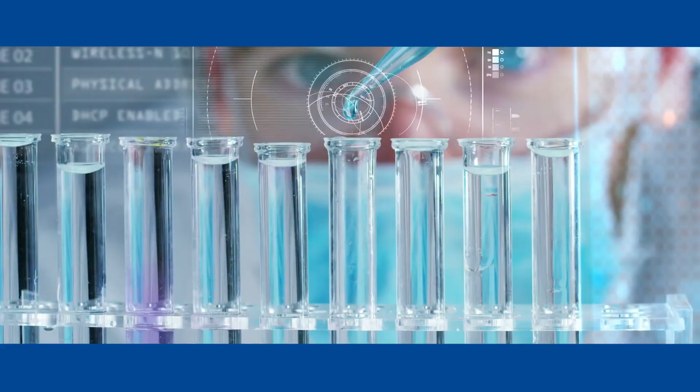In our universe, all things are driven by energy. Energy powers our sun, our environment, our society, even our bodies. Energy is life. New and profound advances in science and engineering are allowing us to harness this energy abundance in marvelous new ways, to create clean, affordable, and reliable energy for all Californians.

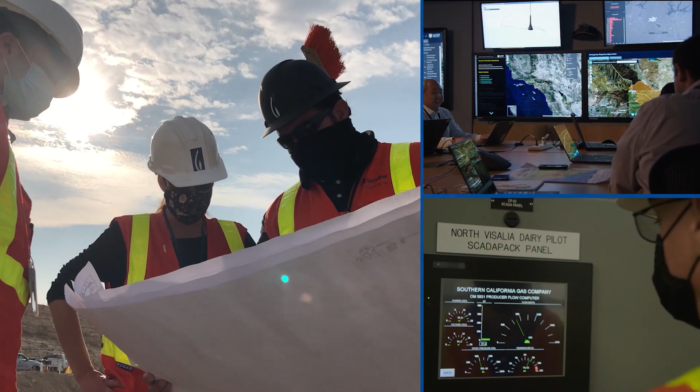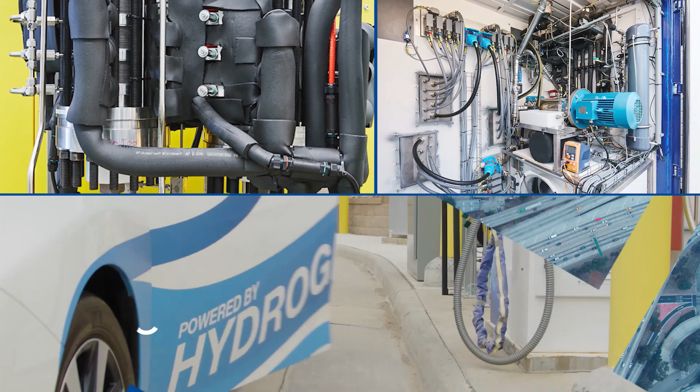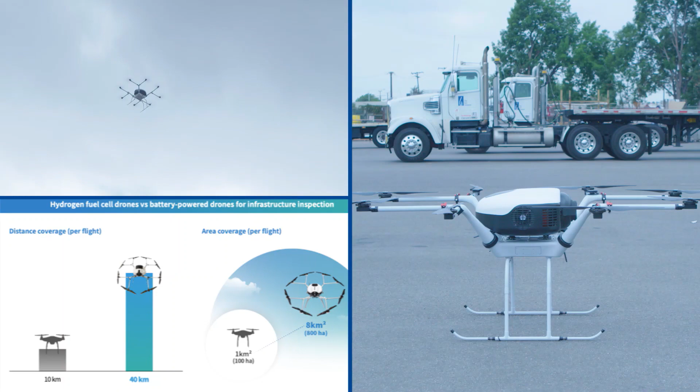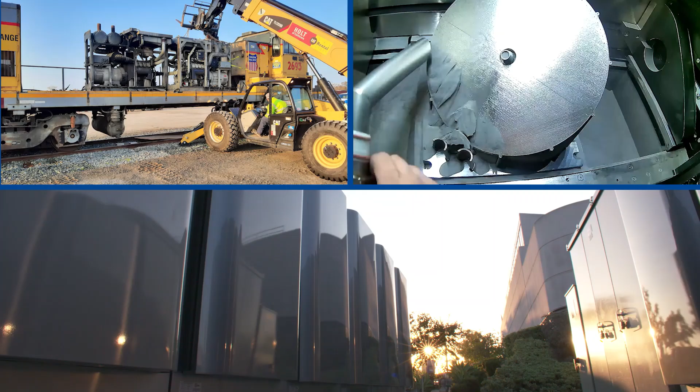Doosan Mobility Innovation's hydrogen drones that have 4 times the flight capacity of lithium-ion powered alternatives. And hydrogen-powered yard trucks that can move massive shipping loads for 20 hours per day with 0 emissions. These revolutionary projects are saving energy, reducing emissions, and improving air quality, as well as increasing energy safety, reliability, and affordability for all.

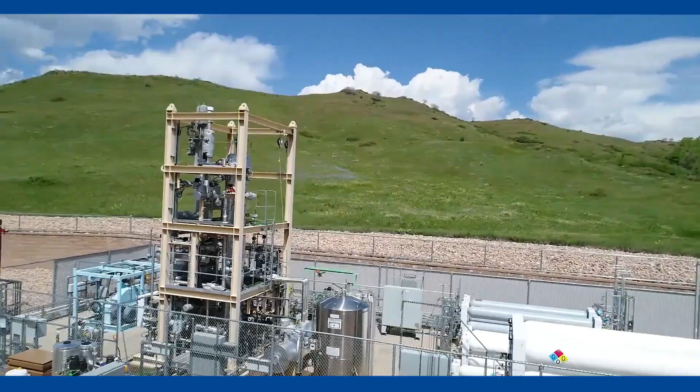At SoCalGas RD&D, we believe in clean energy abundance, so we are sharing this pivotal research in order to deploy these innovative technologies across the world. Because energy is life. And we believe a clean energy future will bring a better future to everyone. SoCalGas, Research, Development, and Demonstration.

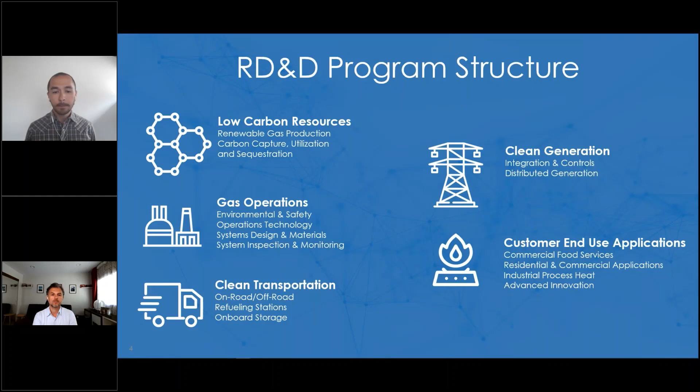In 2022, the SoCalGas RD&D team managed 339 research projects. And on average, our RD&D projects generate a 7.2x funding ratio, meaning that for every dollar of RD&D funding provided to a project, the project also received over $7 of external co-funding. So for example, in 2022, 8 of our RD&D supported projects were awarded about $18 million from the California Energy Commission.

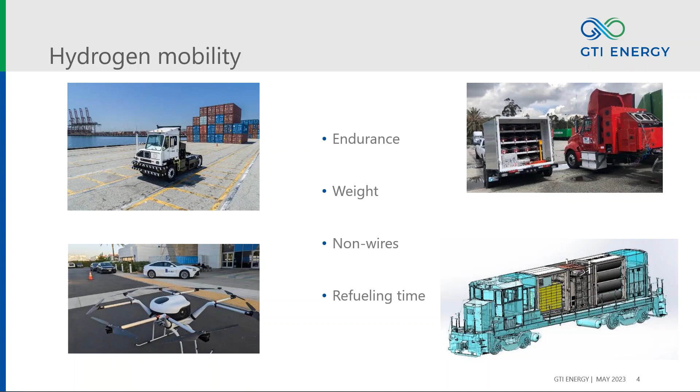So before I go into technical details, I'd like to also recognize our sponsors and partners here on this project. So like I said, the project started, the concept was developed in about 2017. So when you think about it, it's 5-6 years ago.

We had a very strong team that overcame multiple obstacles, including COVID and permitting delays and supply chain disruptions. Nevertheless, we succeeded. The project wrapped up, like I said, 3 months ago, and we have some great lessons learned that I will go through at the end of my presentation here.

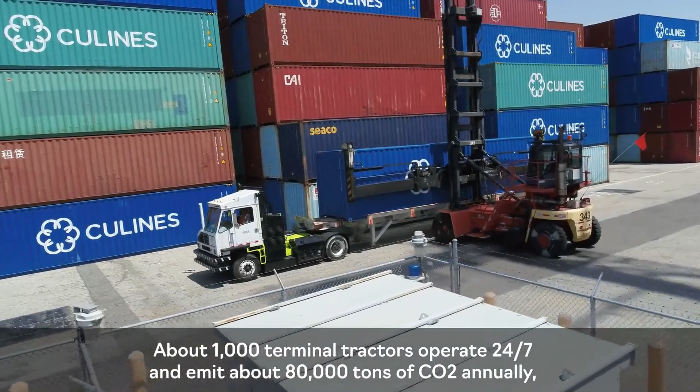Every day, more than 25,000 shipping containers arrive, leave, or move at the Port of Los Angeles. Yard trucks are the workhorses that transfer containers between the dock and the drayage trucks. About 1,000 terminal tractors operate 24/7 and emit about 80,000 tons of CO2 annually, which accounts for almost half of all CO2 emissions emitted by cargo handling equipment.

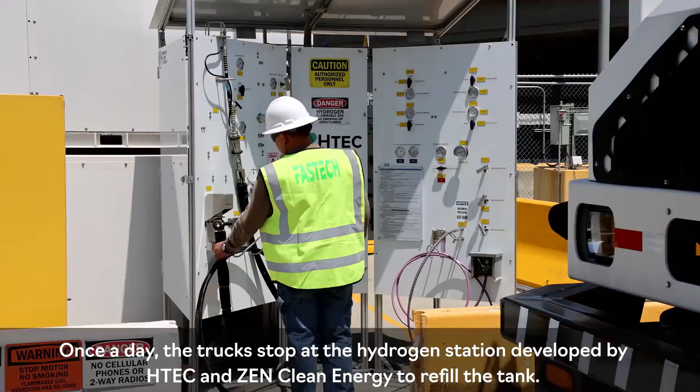The California Climate Investments ZCAP, Zero Emissions for California Ports, project managed by GTI Energy, is putting cap and trade dollars to work to demonstrate fuel cell yard trucks through the rigorous duty cycle at the TraPac terminal at the Port of Los Angeles. 2 plug-in zero-emission Class 8 trucks, built by Capacity Trucks, BAE Systems, and Ballard Power Systems, are moving heavy containers from dock to port gates. Once a day, the trucks stop at the hydrogen station developed by HTEC and ZEN Clean Energy to refill the tank. Fueling is done quickly, which is essential for a busy operation.

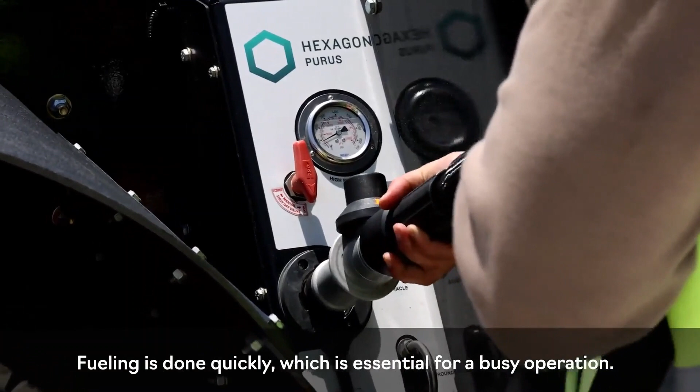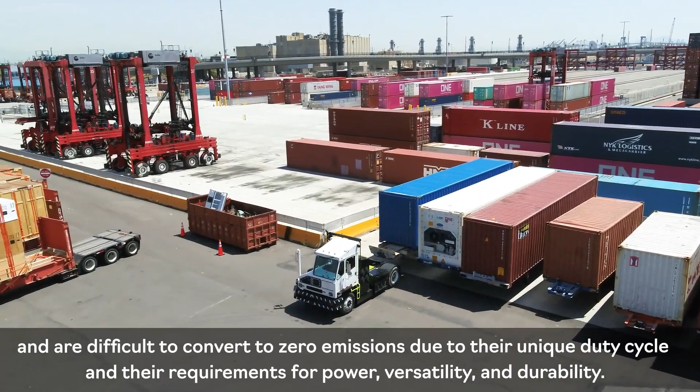Yard trucks are the single largest source of emissions in all classifications of cargo handling equipment and are difficult to convert to zero emissions due to their unique duty cycle and their requirements for power, versatility, and durability. ZCAP's deployment of fuel cell electric hybrid yard trucks is delivering insightful information to validate the vehicle's commercial viability. GTI Energy and Frontier Energy, with the support from SoCalGas, are collecting data that is demonstrating that fuel cell powered yard trucks are safe, reliable, and operationally preferable to diesel equipment.

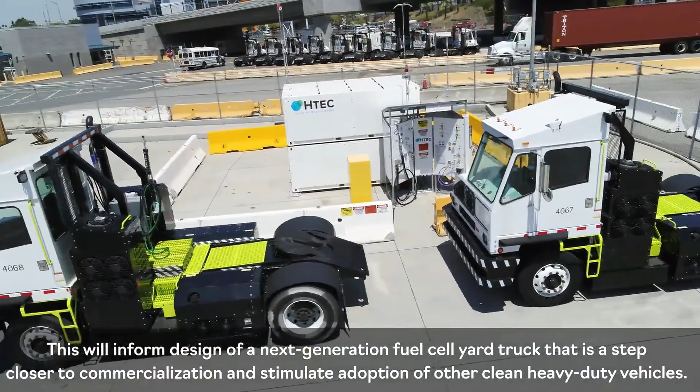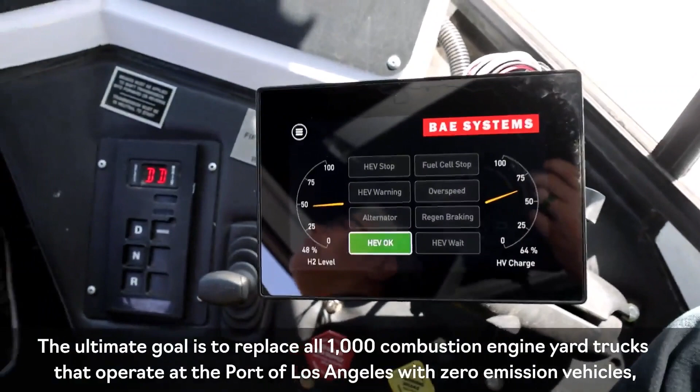This will inform design of a next generation fuel cell yard truck that is a step closer to commercialization and stimulate adoption of other clean heavy-duty vehicles. The ultimate goal is to replace all 1,000 combustion engine yard trucks that operate at the Port of Los Angeles with zero-emission vehicles, which will significantly improve air quality and reduce noise pollution for the people who live near the busy port and workers at the port facilities. The $12 million ZCAP project funded by California Air Resources Board is part of the California Climate Investments. ZCAP will generate increased awareness of hydrogen as a viable clean energy source and showcase fuel cell vehicles as an excellent technology solution to support net zero emission goals.

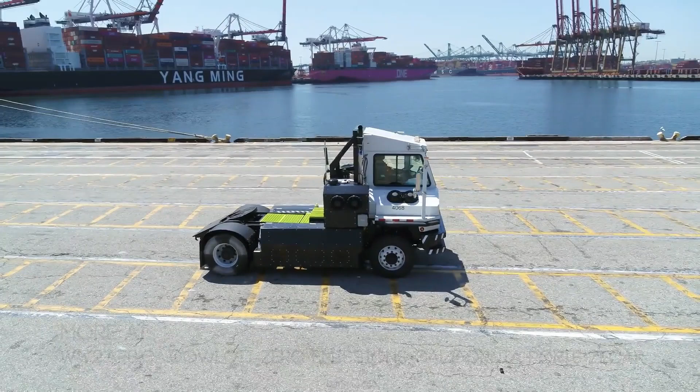All right. So I think that video really does the best job I could think of presenting the intent and the opportunities for the technology. And also it shows you the environment at the port, and I was surprised how busy and how difficult it is to manage that operation. So I'd like to credit all the folks that are working at the ports moving the cargo there.

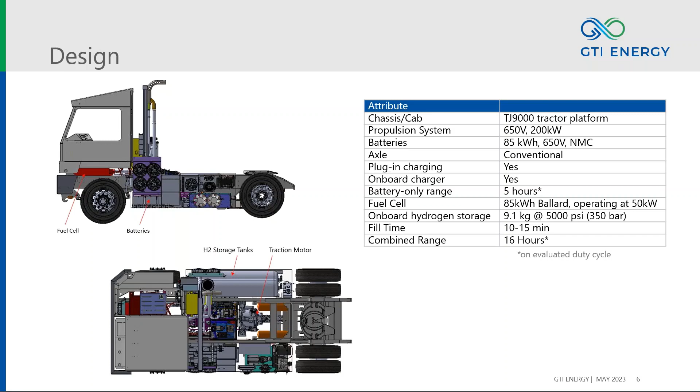So going back to our design here, the key aspects, or the questions that we get the most often, are around the hydrogen storage and the hydrogen systems. And like I said, on the truck, we managed to squeeze about 9 kilograms of storage. You can see these 2 cylinders, they are about 103 gallons by volume. They weigh about 350 pounds, and they can be filled in 10 to 20 minutes, depending on the conditions.

And then the tanks were filled from an on-site fueling station that was developed, designed, and built by HTEC. We had about 180 kilograms of onboard storage in a cascade system. So these are just tube tanks, and the system, due to complexity and budget limitations, was purely manual or analog. We did not have any electronic controls. Only a 120 volt circuit was required to power safety equipment and detection equipment.

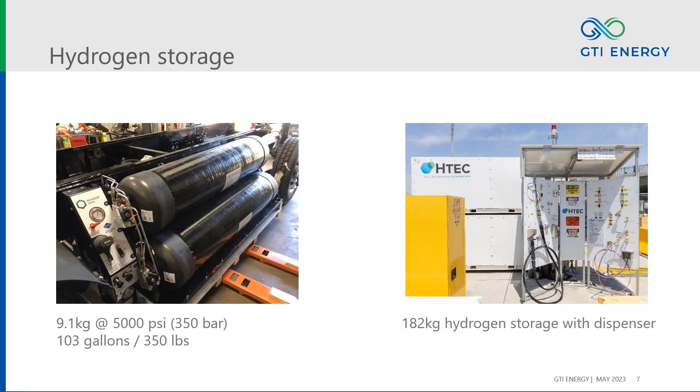And we've learned quite a few things when operating and deploying it. The fueler and actually any infrastructure planning turned out to be more complex than we anticipated. The team went through several potential locations for the fueler and completed the site plan that accounted for any safety setbacks required, any barriers and fencing that was required to protect the station. It also accounted for fuel delivery routes from outside, bringing the hydrogen to the site, and any logistics associated with that.

We went through permitting with 3 agencies. Again, I guess permitting hydrogen at the port is as difficult as it gets. So we worked with 3 agencies here: LA Building Department, LA Fire Department, and also Harbor Department. We conducted a lot of coordination meetings with the authorities having jurisdiction here and first responders.

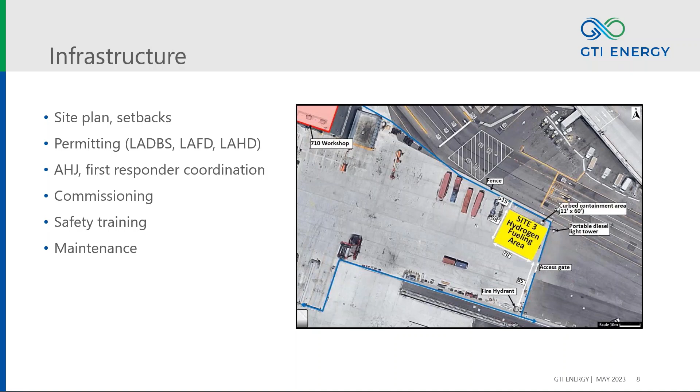The commissioning of the system also involved the fire department, as well as safety training of both personnel operating the equipment and the fire department, so they know how to respond to any potential incidents. And then HTEC supported the fueling station with maintenance of the hardware.

The trucks were operated for about 12 months. We had a few interruptions due to programming or software with the vehicles and a couple of other issues, but in general, the trucks were very reliable. We did not have any hardware failures. There was a recurring concern from the operators about the feel of the power steering system, which was traced really to programming of the controller, and it largely addressed it. But otherwise, it was very successful.

The trucks were used in support duty, which was a little unique for TraPac, our terminal operator here. Their terminal is highly automated, so the yard trucks don't really move the bulk of the cargo, but rather move specialty containers or other equipment. So that duty cycle was possibly a little bit lighter than distribution centers or other terminals. Nevertheless, the trucks performed really well in this setting.

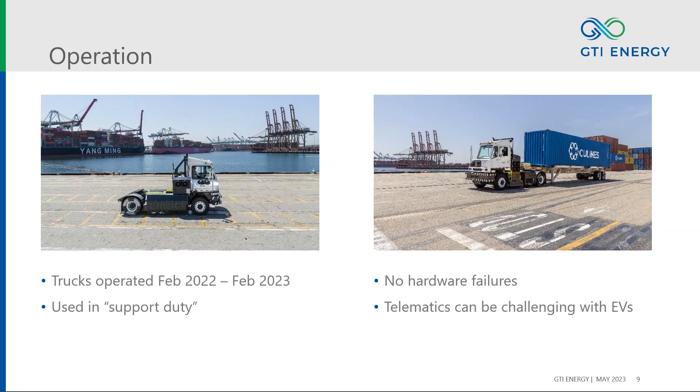We did find that collecting data from these prototype vehicles and these novel powertrains can be challenging. So the telematics are harder than we anticipated. The data quality could have been better, but we did get what we needed, and we did learn a lot.

Now, I think one of the most important outcomes of the project is what we really learned. The first thing is performance, and this is a little bit of a busy slide, but we found that the vehicles consumed on average about 0.7 kilogram of hydrogen per hour, compared to baseline diesel consumption of 1.75 gallon of diesel per hour. If you look at the energy efficiency, the hydrogen truck was 67% more efficient than diesel. So this is already a great success.

As such, despite our concerns with lower than anticipated onboard hydrogen storage, the trucks could operate for 2 shifts continuously if required. In practice, we didn't see too many back-to-back shifts, but given the amount of onboard energy between hydrogen and the battery, the truck would have made those 2 shifts or 17 hours. And here you can also see the advantage of hydrogen, where we had a total of 340 kilowatt hours of usable energy on board. I don't think you could physically pack this many batteries on board if you really needed to.

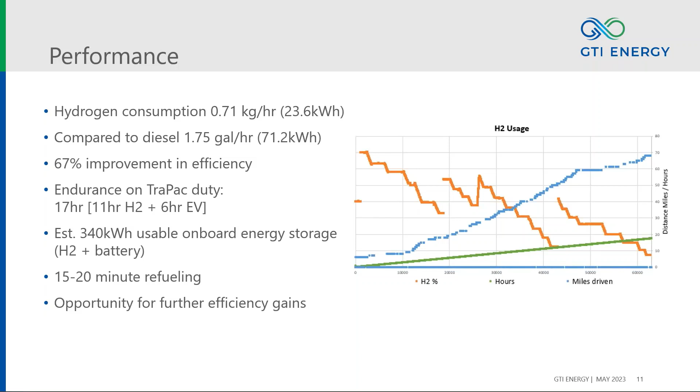Overall, the trucks performed really well. The drivers like them. In essence, they are electric vehicles, right? So it's the instant torque, it's the quiet operation. There's no vibration. There's no diesel smell, which the drivers appreciated. We do hear that quite often, that folks working with diesel equipment bring that smell home, and here the problem was solved. So they appreciate that.

The capacity team did a great job validating and testing the performance. On the left photo here, you can see how the truck was tested in Texas, just pulling a test trailer with weight to make sure that it can stand up to the demands and the duty cycle at the port.

Another thing that the drivers appreciated was a familiar interface. So we did not have any fancy yokes or 17-inch screens. It still looked like a truck inside and had the same controls. The only two differences really were regenerative braking control. There's an additional dial numbered 11 here on this slide, if you can see the detail, where they could adjust the amount of regenerative braking, which again they really liked, because after probably half a shift they would not touch the brake pedal at all.

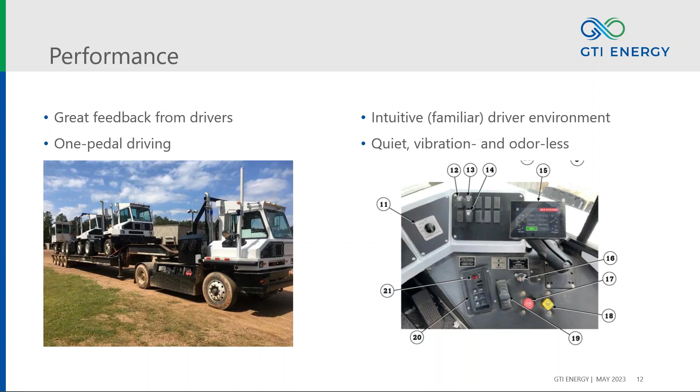They did like that. And the second novelty item was number 15 here, which is a small display showing the status of the electric powertrain. And overall, the drivers liked it a lot, and we couldn't get enough of the compliments.

The next lesson learned that we had was our fueling experience. And the first lesson was that the cascade fueling system that we deployed, while it was cost effective and lower complexity than comparable permanent stations that would have on-site liquid storage and maybe some compression, was still limiting the operation if it was multiple vehicles and a really mission critical operation.

The fueler that we have here, and on the right hand side you can see the control panel. Since it's all analog and mechanical, it required some manual operation from the operators to complete the fueling process. And cascade filling relies on switching banks from the lowest to highest pressure. And what we found is, despite training, there were still issues with following the process. So the filling was not as effective as we had designed it to be.

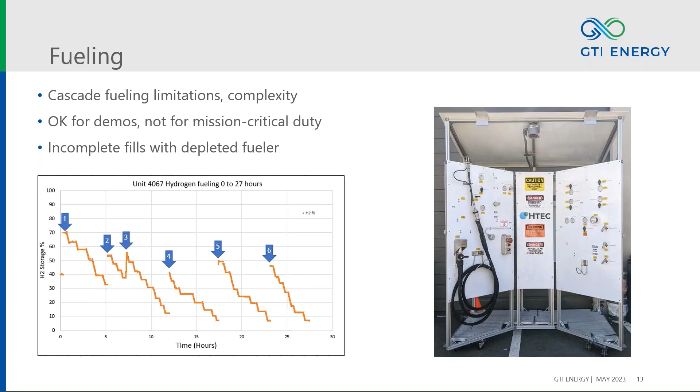So for the purpose of this demonstration, 1 or 2 trucks and the budget constraints, it was still okay, but likely for an application that requires more trucks or more effective fueling, another solution would have to be considered.

Other things to consider here when planning fueling of hydrogen trucks. So the cost and availability can be a challenge. We've had a great partner. HTEC partnered with Air Liquide, so we did not have issues with hydrogen supply and cost. But we've heard from other operators in different vocations that it can be a challenge. So obviously, if you are planning on deploying hydrogen equipment, make sure that you find a reliable partner and you have a good commercial arrangement for the delivery of hydrogen.

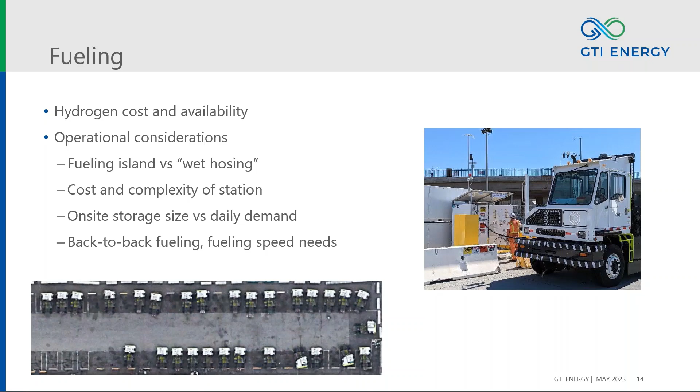Hydrogen dispensing, especially at high flows and pressures, can be challenging, and at some of the fueling stations, those of you that maybe drive the Mirais and light duty vehicles, you probably might have witnessed some time needed for the station to recover from the previous fill and pre-cool the gas again. So there's a lot of things to consider here. There's not one solution that will work for all, and it just requires some analysis and planning to get it deployed effectively.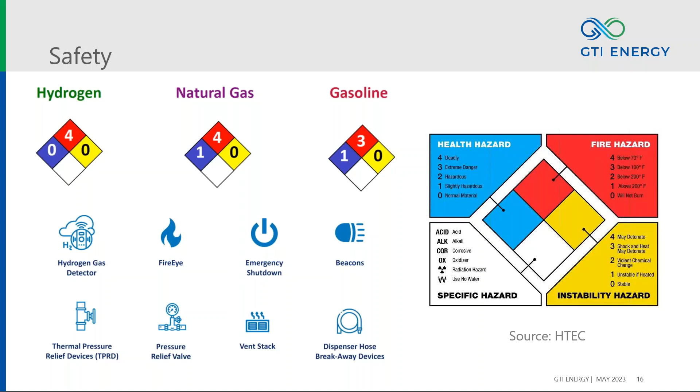You can see the types of safety devices and equipment that's used with these hydrogen fueling stations. It is absolutely safe, and there's nothing to be concerned of. However, it does need a lot of education and kind of dissolving these misconceptions.

Finally, and this is probably the most important and the most exciting learning from the project, is the Capacity Trucks team. They were so satisfied with the design and performance, and also they had such a big interest from the industry that they developed a second generation truck based on the 2 prototypes we've run. They partnered with Hyster, developed a new cab that allowed them to organize the components better. The components are laid out differently. They changed some of the parameters.

They also built the truck in 2 versions, with fuel cells and with battery electric configurations, and they're going into production. I spoke with them a few months ago, and they were expecting to have these trucks commercially available, I think late in the summer. For those of you that were at ACT Expo in Anaheim a month ago or so, one of these trucks was on display there, and we're really excited for them to bring this to market in volumes.

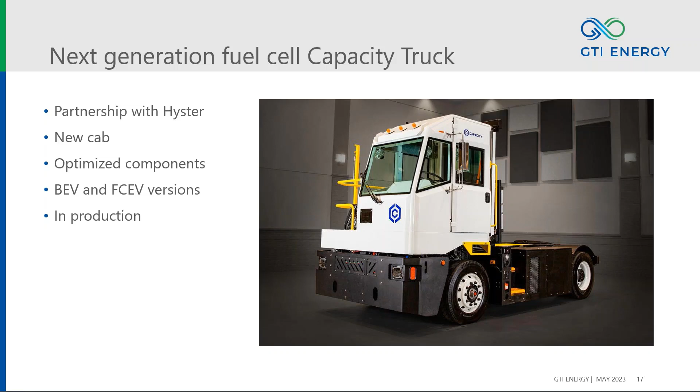What's next? What do we see next in the industry and in this space?

The cost of these technologies and vehicles will keep improving, especially the expensive core technologies such as batteries and fuel cells. They will keep coming down as the volumes grow. I don't expect them to be on parity with diesel, I don't think that will ever be the case. But if you look at levelized cost or total cost of ownership, at some point they will hit cost parity there. Not hardware, but overall cost of operation.

We see that the industry is continuously improving and developing electrified components. Where we started five years ago, there were very limited choices for accessories such as air compressors, power steering pumps, and axles. More and more you see them commercially developed, mature, with improved cost and efficiency. That will definitely play a role in the next generations of designs.

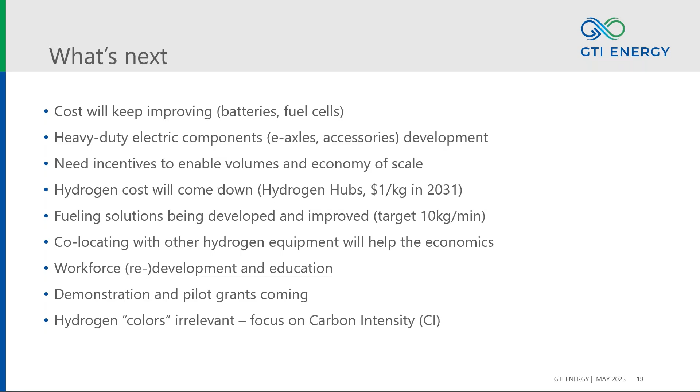So if you do have questions or concerns about sustainability of the fuel or energy that you're using, I encourage you to look for the carbon intensity values instead. And you can buy energy that's cheaper or cleaner, or whatever requirements you have for your sustainability goals. And that's the end of my presentation.

Awesome. I guess, Jeff, I don't know if we've had any questions. Oh, we've got a lot of questions. Thank you so much, Bart. There were a lot of exciting takeaways there. I hope the attendees were able to learn something from this, both about this specific project as well as some of the general takeaways for embarking upon their hydrogen journey, if that is something that an attendee is trying to do. And good to know that there's resources out there to help them.

It's also super exciting from the RD&D perspective that capacity is going to be producing a second generation of this truck commercially, because that's ultimately what the goal is of SoCalGas RD&D, is to help develop and demonstrate new technologies that can ultimately be commercialized and help our customers decarbonize. So that was super exciting to hear, and thank you for your presentation.